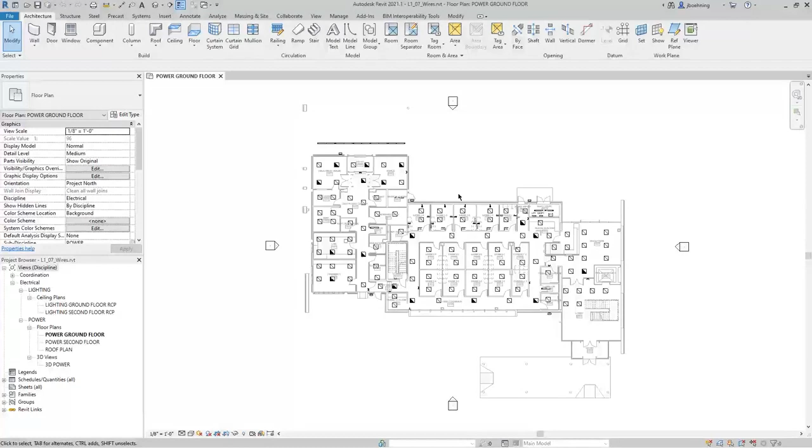In this project, some circuits have been created and we can now add wire to those circuits. This can be done automatically or manually, and we'll take a look at both options.

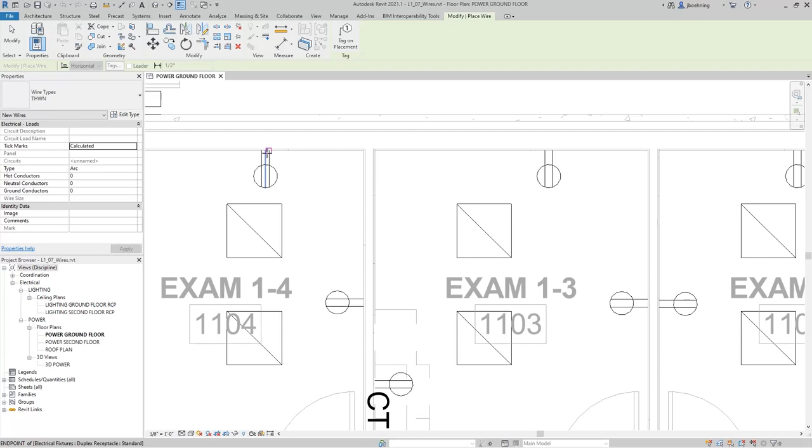On the Systems ribbon, in the electrical panel, there's a wire tool. You can expand this split button and see that there are three wire tools: arc wire, spline wire, and chamfered wire. I'll select arc wire, zoom into one of these exam rooms, and click the receptacle, then a midpoint between these two receptacles, and then this other one, and I can place a wire between those two receptacles. Then I'll click modify to end the command.

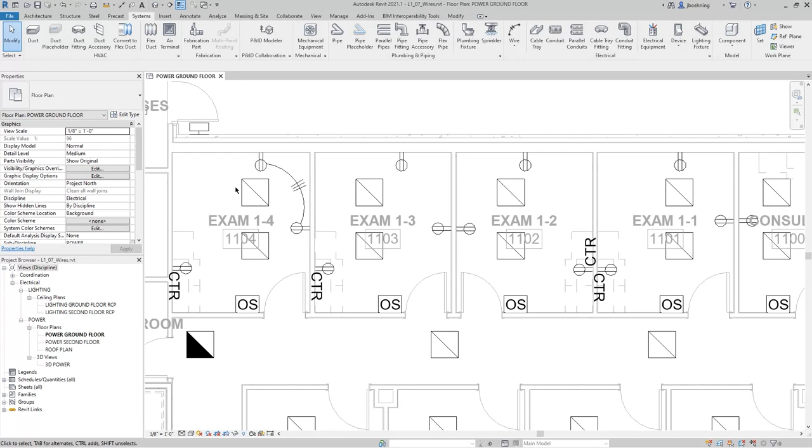That's how you can manually create a wire, simply by clicking points, or you can automatically place wires. We can do that by hovering over a component that is on a circuit, pressing Tab to highlight the circuit, and then clicking to select it. When you do, you can see two icons in the drawing area, one for arc wire and one for chamfered wire, and there are actually two tools in the contextual ribbon that match these icons. You can click either arc wire or chamfered wire. So I'll select arc wire, and when I do, arc wire is placed between all the components on the circuit, so you can see that's a much quicker way of placing wires.

Afterwards, whether you manually create it or automatically create it, you can select those wires and adjust them as needed. So once again, two ways to create wire: either manually do it or automatically create those wires.

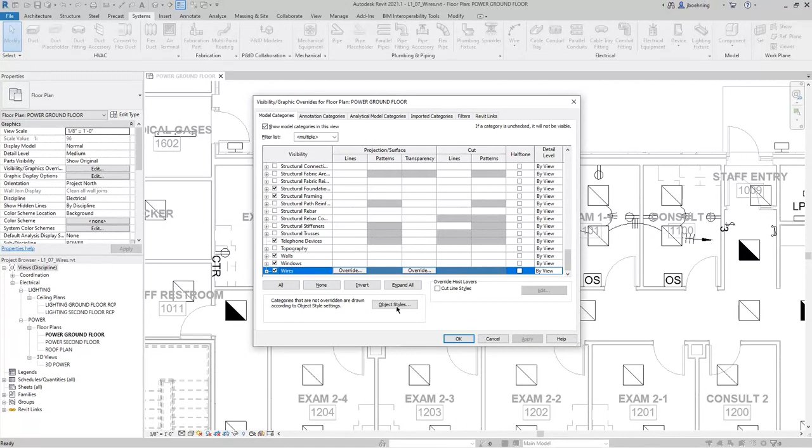A couple notes about wires. Wires is a model category, and I can see that if I go to the visibility graphic overrides dialog, I can see wires, but it behaves like a view specific element. So these will not appear in other floor plan views, and we can see that if we duplicate this view, we can take a look to see those wires are not here, whereas things like conduit and cable tray would be. So just be aware of that when working with wires.

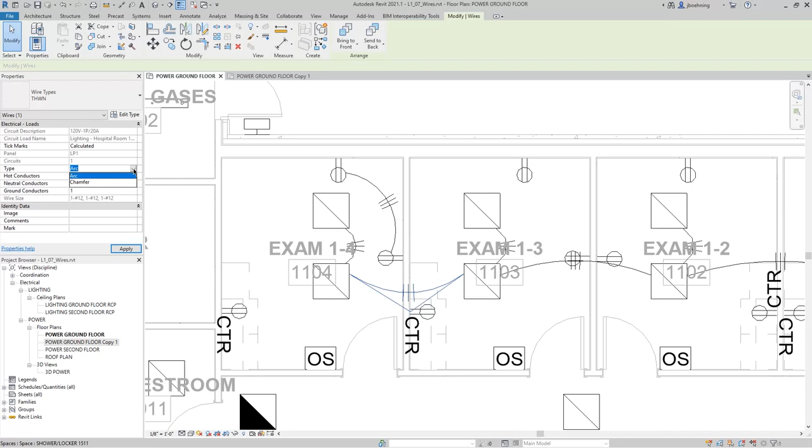Also, when you select a wire, you can adjust certain parameters, such as the tick marks. You can even adjust the type, whether it is an arc wire or a chamfered wire. You can switch between those if needed. But in this case, to be honest, if you want to switch from arc to chamfered, you should just delete the wires and then automatically create them again as chamfered wires.

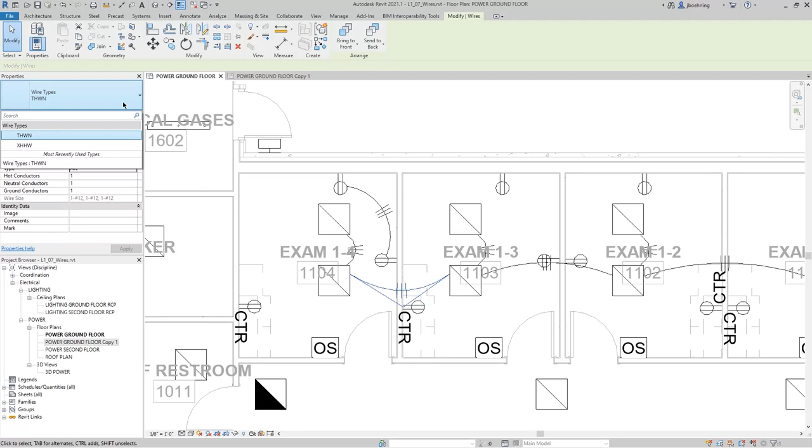You can control the number of hot, neutral, and ground conductors, and those are the instance properties available. You'll notice that wire size cannot be adjusted, and that is calculated by Revit. You can also create different wire types as needed, and if you click edit type, you can see the type properties, where you can control things like the material and the temperature rating, insulation, and the other parameters you see here.

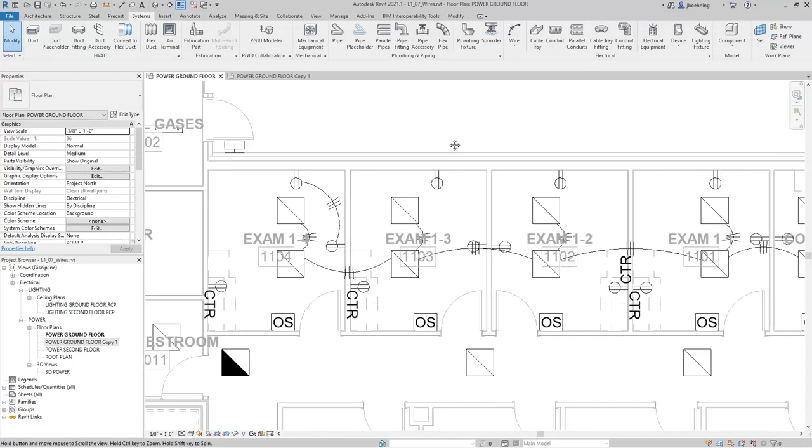I'll click OK to close this dialog. One thing that is troubling to some Revit users is that they cannot adjust the wire size, as in this case, as we just saw, the wire size parameter is grayed out and cannot be adjusted. So one of the ways that you can adjust the wire size is by adjusting the circuit path, and we can take a look at that.

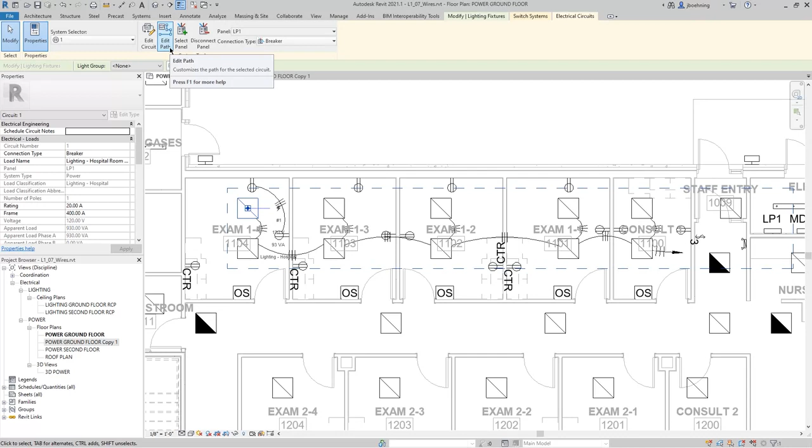If I select one of these light fixtures that are on the circuit, I'll switch to the electrical circuits contextual ribbon, and you can see that there's an edit path tool, and I'll click edit path. When I do, I can see the path from the farthest device on the circuit to the panel, and in the contextual ribbon I can see the length of this circuit path, and then I can adjust the path mode and the path offset.

So before I do that, let me scroll down a bit in the properties palette so that we can see the voltage drop, which plays a big part in Revit's calculating of the wire sizes, and then you can also see the wire sizes for this circuit.

If I change from farthest device to all devices, you can see the voltage drop changes. In this case, the wire size does not change. But if I change it back to farthest device, you can see the voltage drop change again. This time I'll adjust the path offset, and the voltage drop changes, but the wire sizes don't.

But just so we can see that, if I select the path, in addition to modifying those parameters, you can actually move the path lines as well. And if I drag this, we'll just drag it all the way down for sake of example, you can see that those wire sizes update accordingly.

Obviously the length here is quite a bit longer, and that's why those wire sizes are adjusting. As I move it back, you can see that those wire sizes will change accordingly, because as Revit is calculating the length and the voltage drop, those are all being taken into account to calculate those wire sizes.

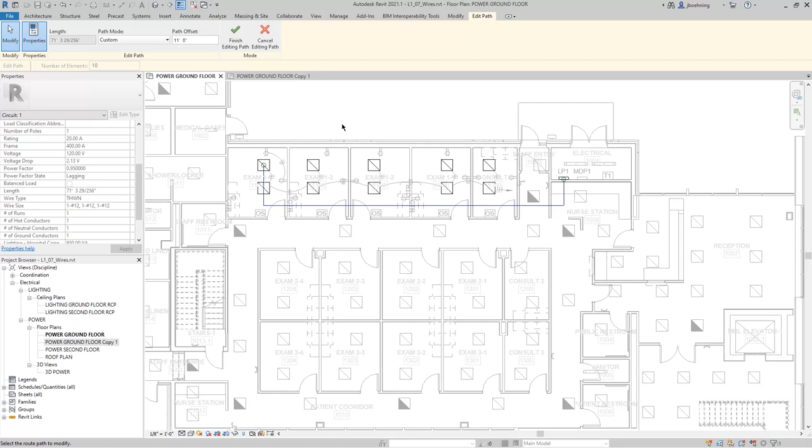So just to summarize, if you want to adjust the wire sizes, it's not something you can do by adjusting a parameter, but you can edit the circuit path in order to adjust that. I'll click Finish Editing Path.

So just to summarize, you can create wires manually using one of the wire tools, or you can create them automatically by hovering over an item on a circuit, tab select, and then clicking either arc wire or chamfered wire.